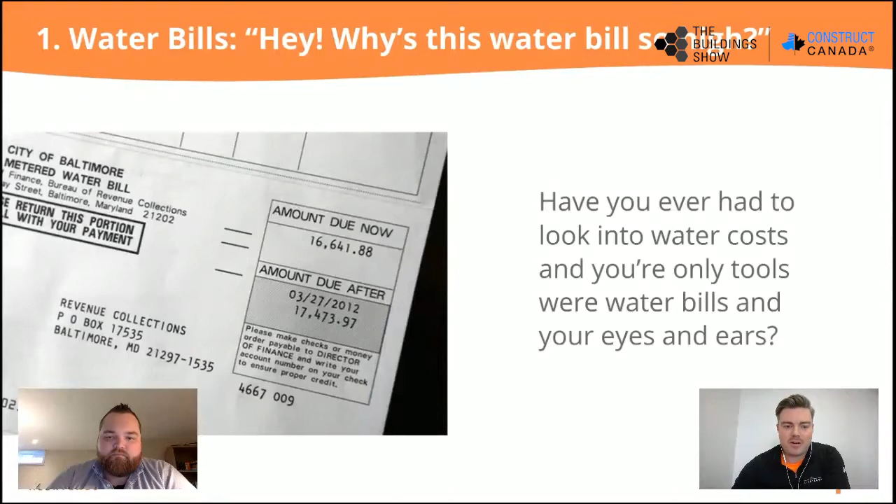Yeah, there's not much you can do once the bill comes in. There's no fixes that can be done. Yes, you can avoid it in the future, but once that bill comes in, that's the money you owed, and that's it.

Especially when water rates are going up constantly in both the Canadian and US markets - as much as 100% increase in the Regina area, and in the GTA we're seeing anywhere from 40 to 80% increases. Right across the country, we're seeing this trend. The only way to effectively change and control some of these costs is to manage when water is being used and how much is being used. At the end of the day, the costs are going to continually go up, so making sure we're on top of these leaks in real time is going to be very important.

A good comment you had the other day, Jordan, was that water costs are going up - what does that mean for rent? That means rent's probably going to go up as well. Absolutely, and unfortunately rents and leases are sometimes locked in, and we can't cover all these changes in increased cost. So the only way to do this is to manage the actual water use and try to mitigate some of the consumption.

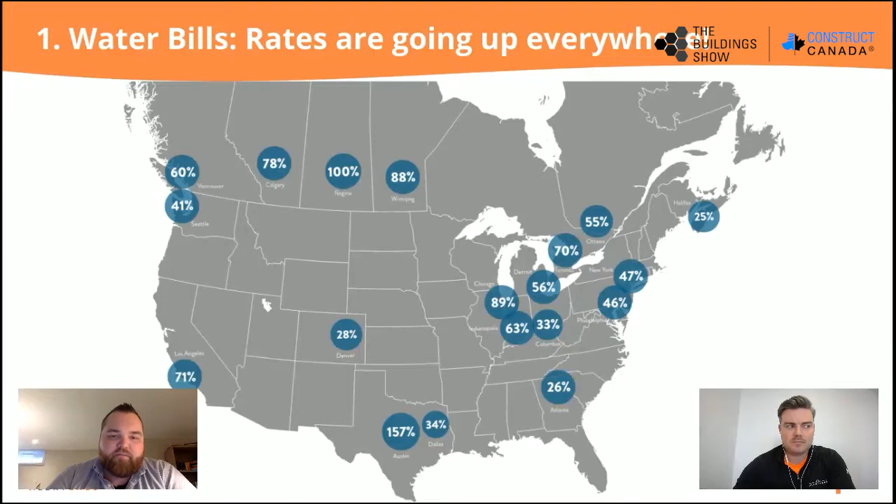So let's look at real-time water usage visibility - how can it help? The importance of real-time visibility is it gives you an understanding of when water is running through the property. You'll be able to break down granular consumption to as much as minute-to-minute data points, so you can really understand what your leak consumption is and quantify that, and even break down what your mechanical systems are using.

So you're going to see the operational time of your irrigation system, your boilers, and anything else. Even if you're filling up a pool or any other systems in the building, you'll be able to quantify what that system costs you to fill up and operate. Especially when it deviates from normal activity, you'll be able to react to it in real time to make sure repairs happen and the system is running optimally.

Yeah, some level of visibility you can gain from this is knowing how much it costs to cool your building. That's pretty key - sometimes you're just blindly getting the bill and saying, how much did it cost to do this, how much did it cost to fill the pool? With this type of visibility, you're able to start to pick those apart and prioritize - should we be paying this much? Is this something we can reduce as well?

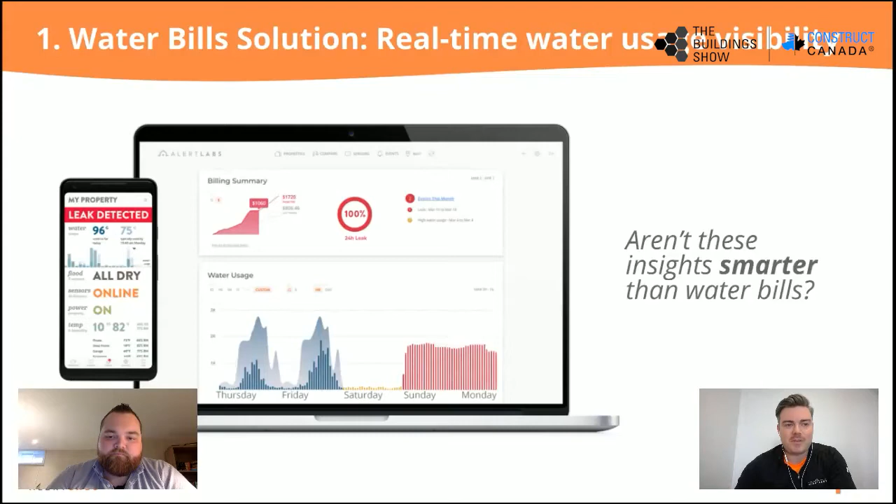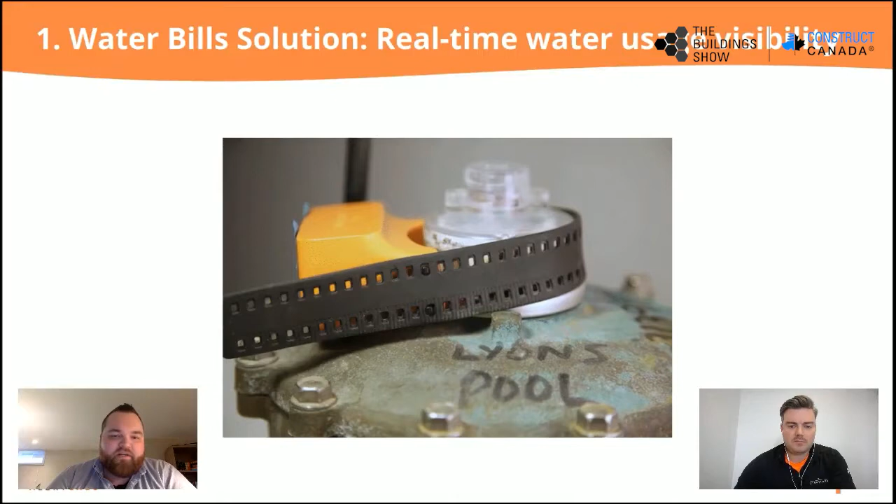Smart sensors are supposed to be very easy to deploy. IoT technology is meant to be strapped on as easily as this on a water meter and provide you the insights we were just discussing. That looks pretty easy, and a great animation as well.

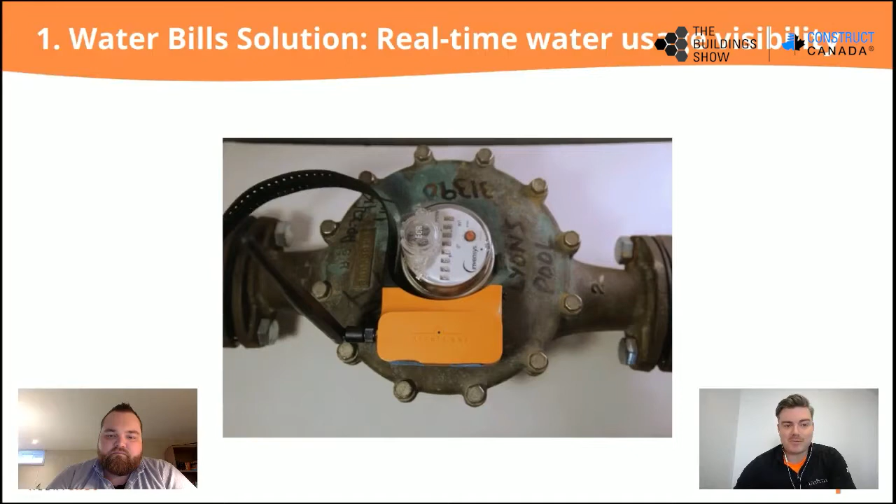Let's move on to number two, water damage. Emergencies at 3am, not fun. Nobody wants that. Nobody wants their cell phone ringing. Nobody wants to have to get out of bed, especially as we approach the winter months, and go into the unit.

So as we get these calls at 3am and have to react to these problems, one of the main benefits of including a smart sensor is to be able to respond to these issues in real time so we're not reactive and facing major infrastructure damage.

Obviously, when these events happen, they're a massive waste of money. These are non-budgeted events. It's extremely emotionally draining, not only on the staff and maintenance team, but also very hard on the tenants or owners of the units, making it very difficult for them to either live in their space or continue operating their business if it's a commercial application.

It's also very time intensive, making all the repairs, ensuring mold remediation, all the infrastructure work, and mobilizing trades is very difficult and time consuming, especially in the climate we're in right now with COVID. It's very difficult to get all these parties involved and make sure everyone is safe and following the right practices. Cutting down response time to these leaks is imperative to minimize the amount of damage and strain on the entire system.

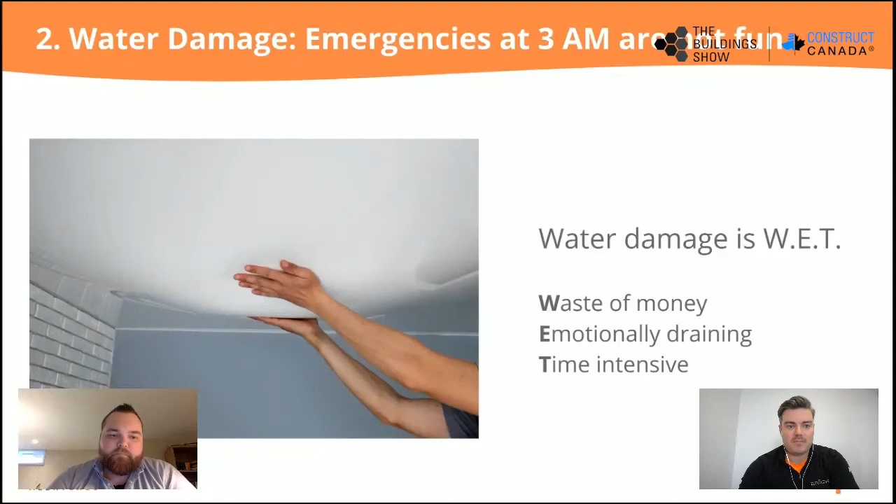There are lots of areas in buildings that are constantly aging. Even brand new sites can have infrastructure breakdowns, typically related to plumbing repairs and things like that. But as aging buildings continue to get older, the infrastructure will continue to wear and break down.

A few common pieces are laundry hoses. They get brittle, break down over time, lose their seal, and eventually either blow or start to leak and cause damage. This is one of the most common pieces we see failing in buildings, where floods and leaks go undetected and cause lots of damage on the laundry units.

Other common areas, as we're all aware, are under your kitchen or bathroom taps, and of course toilets are always a prevalent area where leaks and floods can happen. All of these pieces are inevitably going to have a leak. It's just a matter of being proactive, understanding that as aging life cycles come up, repairs and maintenance are needed, and especially with aged infrastructure in your existing property, minimizing the risk and reacting faster when a flood does happen is going to be very important.

So true. Something we often talk about with our customers is minimizing the severity of events, so how can we reduce that time? Something we'll get into a little bit later.

A key point here too is talking about fridges with water ice makers and direct water lines. Those flex hoses crack or are incorrectly installed very often, and water could be running onto the wall behind your fridge and you'd never know about it, unless you moved your fridge and did a cleaning. And we all know we don't do that too often unless we're moving out of our units.

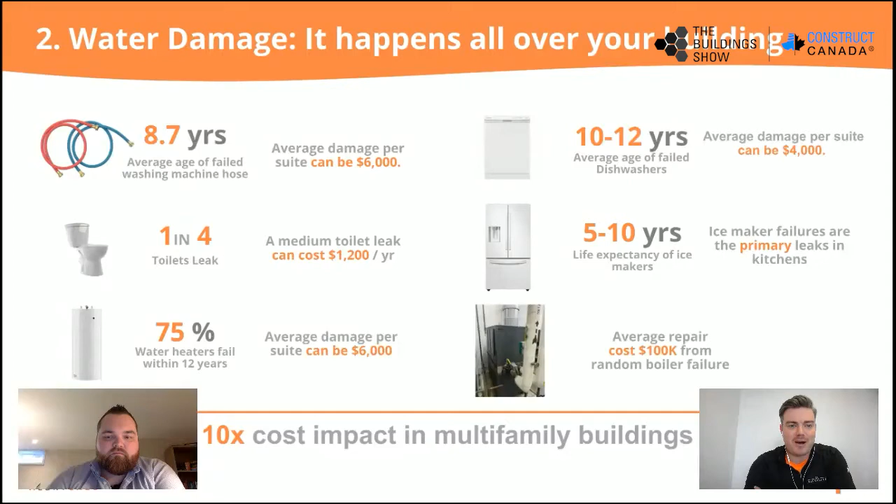A typical condo flood right now costs $250,000, and this isn't just to repair the units. In a lot of cases, this covers the cost of removing tenants from the space, deductibles, repairs, and bringing in trades. The complete process usually costs around $250,000. So any way to avoid this and cut these costs down is going to be very important moving forward for property management and asset managers.

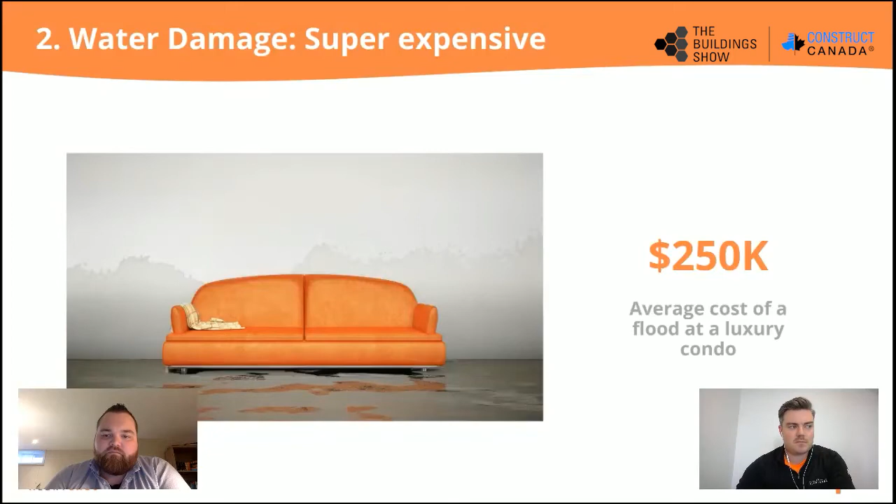The longer the delay, the more the damage. This is something we hinted at a couple slides ago, but we want to go into more detail. Water damage, by the time the event is actually discovered, is completely correlated with the cost of the flood. So the faster we can create response times, the faster repairs get done, and the cost incurred is drastically cut down.

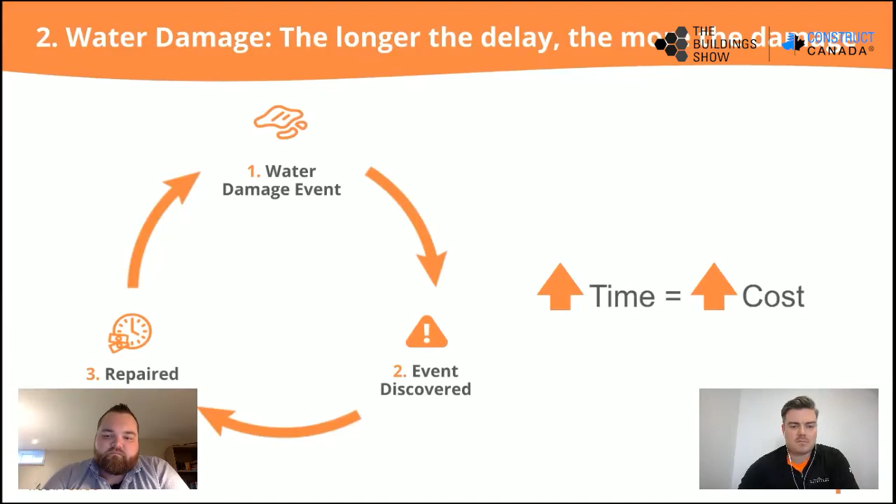Time is money, we've talked about it. The president of Chubb North America mentioned that the time it takes to discover a leak is the single greatest factor in determining the amount of damage. This is where smart sensors are imperative, being deployed so that time frame can get cut down, even from an hour response time into 15 or 20 minutes. That will make a massive difference in the amount of damage and how long repairs will take.

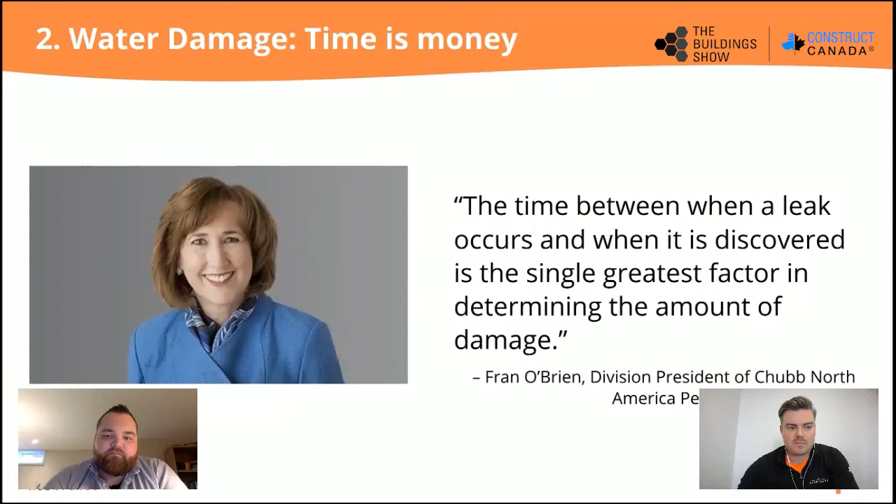Let's talk about the solution. Flood pucks are a main component of flood detection. They can be remotely placed anywhere in a building and typically won't require any infrastructure upgrades. They can be customized and placed everywhere from laundry units, dishwashers, and bathrooms, to condensation fan coil drip pans to make sure they don't overflow. They can be strategically used in lots of areas, even high volume, high risk areas like mechanical rooms. Basically anywhere you want eyes on a potential flood in real time, that's where you put these flood pucks.

Jordan, you mentioned a couple different locations. When talking to a client, what's the first area you think they should protect? I think it would have to be your mechanical areas and laundry area. They're the most prevalent and common leak areas in the building that cause floods, and typically cause the most damage. It's the amount of water in those rooms, in those cushion tanks, in those hot water heaters, something you really have to be aware of.

Absolutely. Major infrastructure, when it breaks down, especially with high volumes of water, is going to be costly and affect the entire tenant base in the building. If they lost a boiler or a hot water tank, everybody would be showering with cold water the next day.

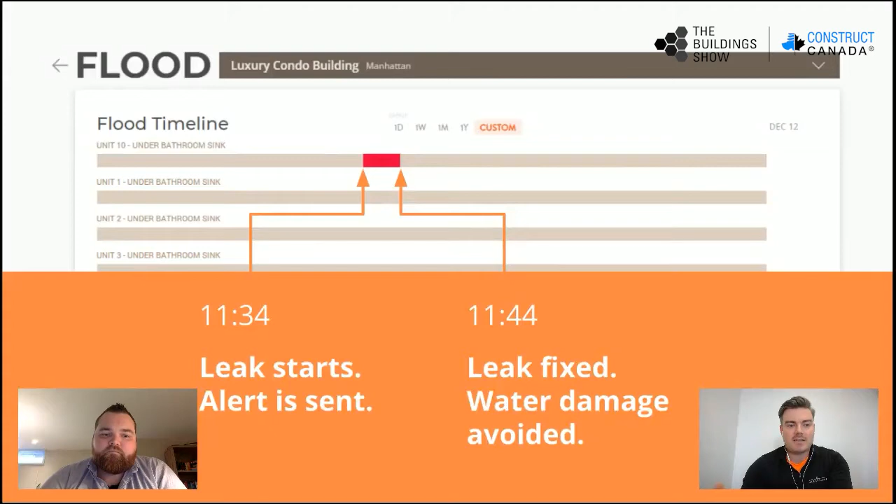It's really key to not only get this quantitative information to say this is when it happened, this is how often it's happened, the duration, but also action your team to start getting you more qualitative information to say what happened, what was the fix, where was it. Is it simply somebody mopping up, or is it a pinhole leak? These are key things to track at your buildings as you deal with aging infrastructure, to see if they're patterns or one-offs.

With the flood pucks, as mentioned, you can be very strategic with placement. Showing an elevator pit here, building managers and owners can all relate to this. As soon as a cab touches water, there's an extreme amount of cost involved in getting that cab operational again and getting TSSA to release it. So understanding if there's ever water in those pits is very, very important, so you can shut that cab down prior to it hitting that water, find out what's going on at the base of the pit, and get it repaired before receiving thousands of dollars in a bill from your elevator technician.

Another key point is in these times with limited restrictions on how many people can be in an elevator. If you have 3 banks of elevators and one goes down, that's going to increase time for your tenants to get up to the 15th floor, 11th floor, and people start to build up in those lobbies. Avoiding these issues will avoid this congestion and the many dominoes that come with it.

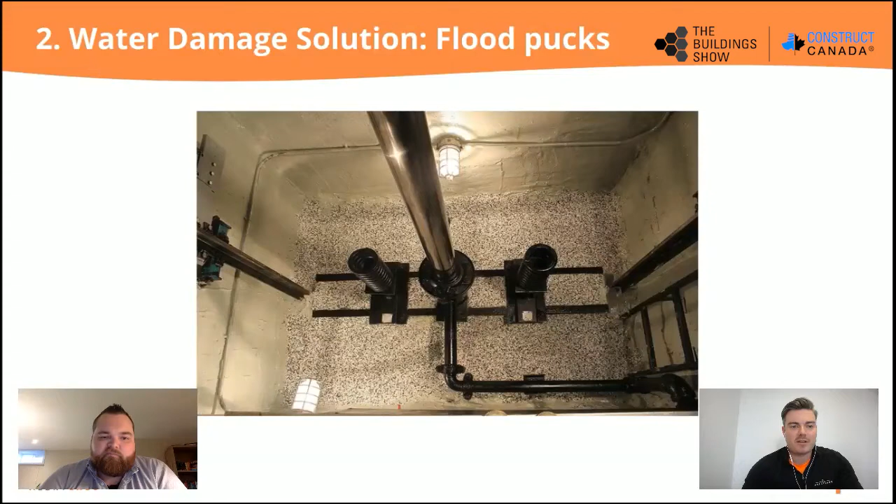The other piece of technology is a water overflow sensor, and these sensors can monitor sump pumps and their health and how they actually operate. They'll monitor the depth of the water in the pits and that they're being evacuated effectively and properly. In times of power loss, when that pump potentially does not have power, it's still going to remotely monitor the system for you and give you real-time alerts as the pit is filling with water and potentially overflowing. You receive those notifications, so you can create an appropriate actionable plan to hopefully get that issue rectified before it actually damages the site.

Another one of those locations where a large amount of water can be collected that can cause a lot of damage in a very short time. Key to keep track of this as well.

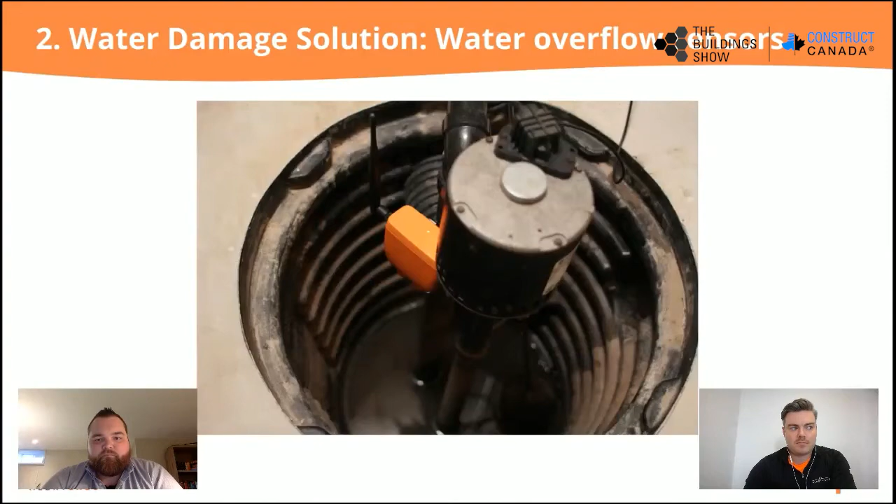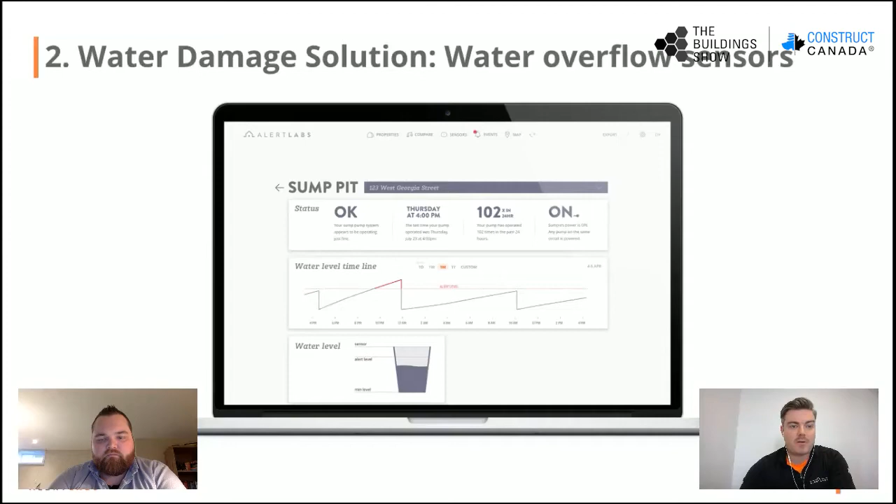Again, circling back to the dashboard, it's important that the data is palatable, easy to understand, and itemizes everything. Here, showing you the sump pump data, you can see the pump pumping out and refilling and pumping out again. This gives you the life cycle of the pump, seeing that it's running properly, as well as pit warning levels for consumption. This also helps with monitoring the health of your sump pump - what's happening, how frequently it's going off. If it's going off every hour, that lets you know the lifespan of this particular unit may not be as long as at another building that only goes off once a day or once every 2 days. So that wear and tear on those units can be monitored.

One other item that's very important is the automatic water shutoff valves. These can be strategically placed anywhere. You can put them in high volume mechanical rooms, on varying sizes of pipes. They can even go on individual unit shutoffs, and this gives you that remote capability to automatically shut water off from either your smartphone or the dashboard online. So you can literally be anywhere in the world and remotely turn off the water.

Now, these systems can also be trained to be very smart, so individual flood pucks can be deployed in strategic areas, and they can basically be trained to say any water that's been located on X number of pucks will shut off this automatic shutoff valve. So then in the event a leak has occurred and there's flood damage taking place, they will automatically send that alert and shut the water off. So that issue will then be remedied until human interaction can then take place and make the appropriate repairs.

But this is a massive piece to the puzzle when we're trying to cut down on response time, and insurance companies in a lot of cases are looking for this type of technology as well, which is what we're going to touch on in another few minutes.

Yeah, it's key to have that two approach system, right? It's not always automatic shut off. You can also go into the application on the dashboard for the shut off and turn it off manually after you get an alert. That way you're not shutting off water to the whole building just because a mop pan spilt over or something like that, right?

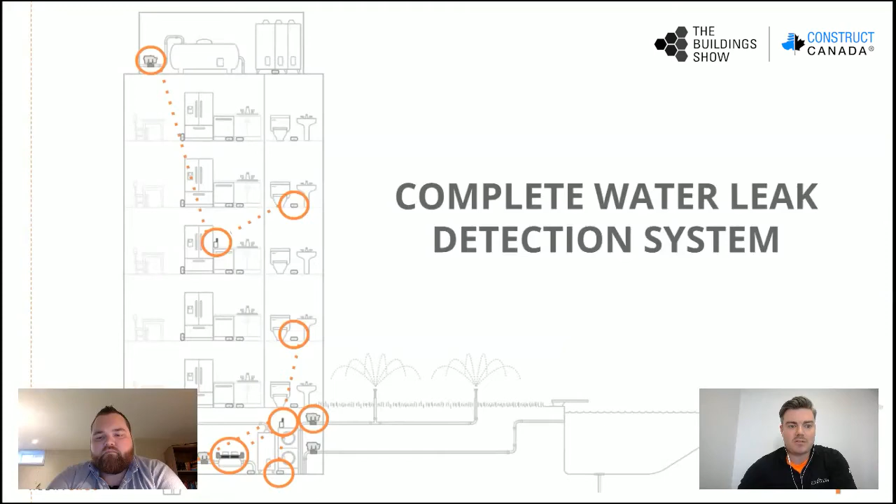So move on to number 3, like Jordan talked about, insurance costs. I need insurance to cover my insurance. We'll get into a little more detail on that and what that means on the next slide.

So circling back to the water damage event and the time closed to the event discovered and then it being repaired, this is completely driven by our insurance costs and our current rates that are continually skyrocketing. And as mentioned previously, with the insurance firms getting heavily involved in this, this is now a double-edged sword where the benefits of having smart systems and smart sensors deployed in the buildings is imperative for the building's operations team and the tenants themselves to make sure they're mitigating as much of these risks as possible.

But it's also the insurance companies now getting involved as well. And because they're understanding that these types of sensors are cutting down the regular claims that are being made with water events occurring, this is closing the gap now for both sides, where the faster we get to these problems, the less damage there's going to be, which is the least amount of occurrence of a claim being made, which means the faster repair for the site, and we get back to normal.

It's interesting to see that insurance is getting as heavily involved now, and we're going to talk about that in the next coming slides, as this is the future of managing buildings, having to have these types of smart sensors involved, even to carry insurance.

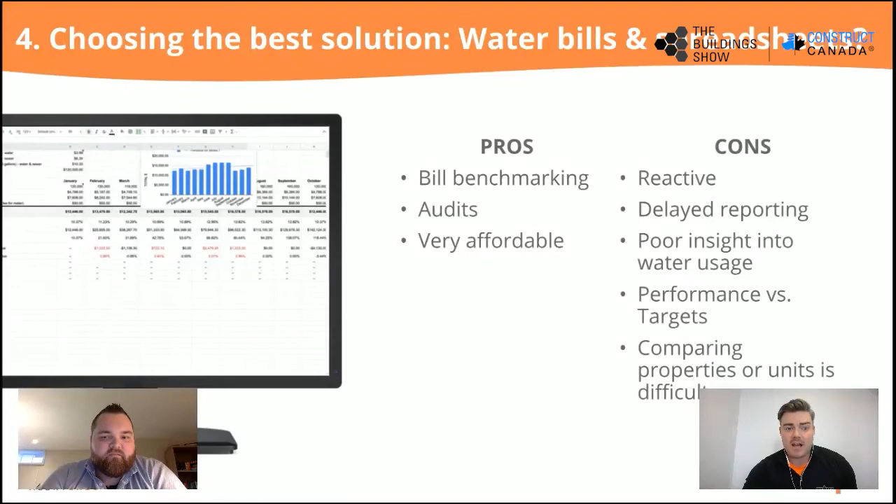Jordan was pretty excited when he left that role to join us here, because he was able to throw his Excel for Dummies book out and focus on the dashboard instead. That's big—not everybody's going to have the ability to make those calculations in a spreadsheet. Having a tool to do that for you, with custom reports and all that stuff, saves a lot of time and a lot of manpower as well.

One big advantage of the smart sensor piece, which we'll talk more about in a few minutes, is not having to require infrastructure upgrades and rewiring buildings. When you implement a BAS system, yes, they're giving you great data from your sites, and we're finding a lot of buildings have these systems in place now over the years. They've been around for a long time, which is great, but they're typically focused on your electricity and gas consumption. They're not always as focused on water, and definitely not looking at leak or flood.

These systems are definitely useful, but they're very complex. They take a long time to deploy, and not everybody understands the data that's coming out of them. So it's not necessarily user-friendly or something you'd want to deploy through your entire property management organization. A big challenge will be understanding the data, being able to comprehend it, but also the data points coming out of it are not as granular when it's not purely focused on the water piece. We do see some BAS systems connected to water meters - they'll give maybe an hourly resolution to consumption, if not just daily readings, which is just a pulse output off the meter. So it's very broad, still doesn't give you any breakdown or real understanding of what's happening in real time or minute by minute. That's where the real value of having these smart sensors can really play a role in a building.

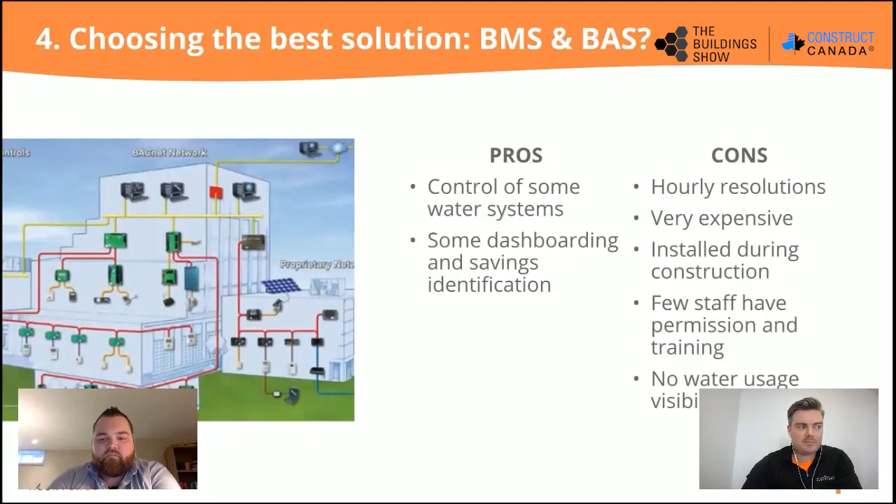Absolutely, it'll definitely add up. So let's move over to Wi-Fi sensors. The key thing we've kind of alluded to and keep talking about is what happens if the power goes out. Unfortunately, Wi-Fi sensors are great for our homes in small spaces, but when we're dealing with large infrastructure like a stacked multi-res building, it's very difficult to have Wi-Fi reach every area of the building, especially in parking garages or mechanical rooms. And in a lot of cases, these older buildings don't have Wi-Fi signal or supply for the entire property. So they're not reliable, and that goes for multiple facets.

It's connectivity, but it's also when the power goes out, or a modem needs to be replaced, everything will have to be recalibrated. All the sensors will have to be repaired, and it can take a tremendous amount of time - it's extremely unreliable. Even when there's storms and things happening, buildings can flood and different events happen, and that's when you need your system to be working properly. So having a system reliant on Wi-Fi is definitely not the best for a commercial real estate application.

So it sounds like if the power goes out, you could be spending a lot of time once it's restored walking around the building, unplugging your routers, plugging them back in, unplugging your repeaters, plugging them back in, going to your smart sensors to make sure they're communicating - something that wouldn't be automatically restored or maintained with other solutions that have the ability to work without Wi-Fi. Absolutely, having a battery backed up system and something that's cell connected is imperative to make sure you maintain your online connection through any type of weather or event taking place.

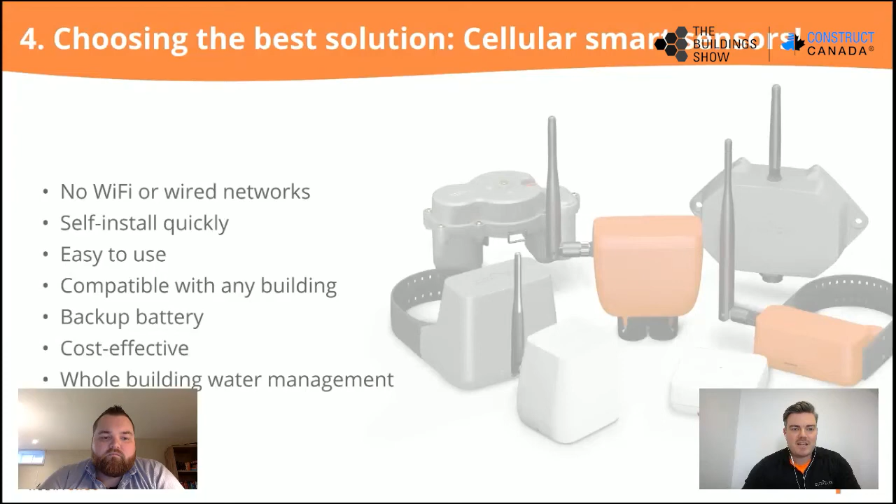Backup battery too - power outs, cell network's up, 24 hours backup at least would be great. Features that we've seen before. And then something that we keep hitting at, cost effective. The cost of outfitting your building is less than the cost of that damage you had a few months ago, typically, and then less than those insurance claims and deductibles that you'd have to make as well too.

Create your network with the cellular devices, place the companion pieces out into each unit. You can even simply place them outside the door and with the label say dishwasher, and the tenant knows to place it by the dishwasher. Pull the battery tag, you can do that yourself, and that's communicating to the network. And then you have the visibility of seeing the health of those batteries, health of the sensors remotely on a dashboard to know that you don't have to go in to check it. The tenants don't have to be responsible to check it as well too. Having that remote access and touch, decreasing the touches is quite key.

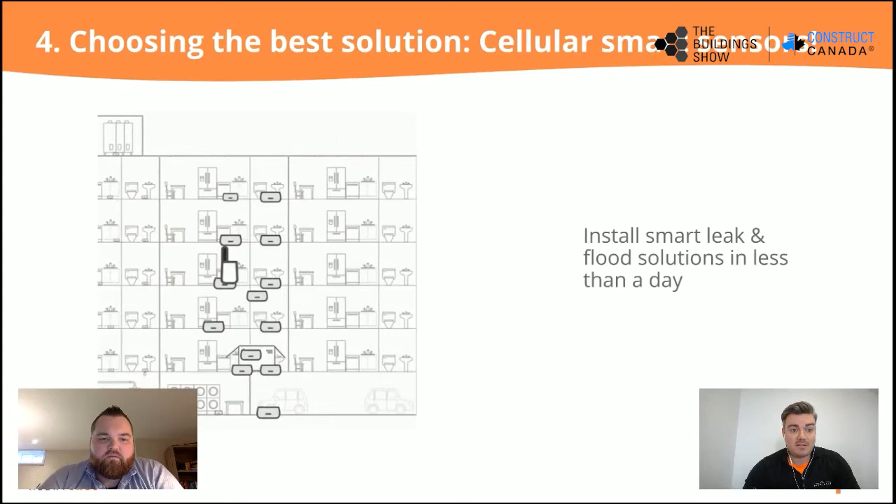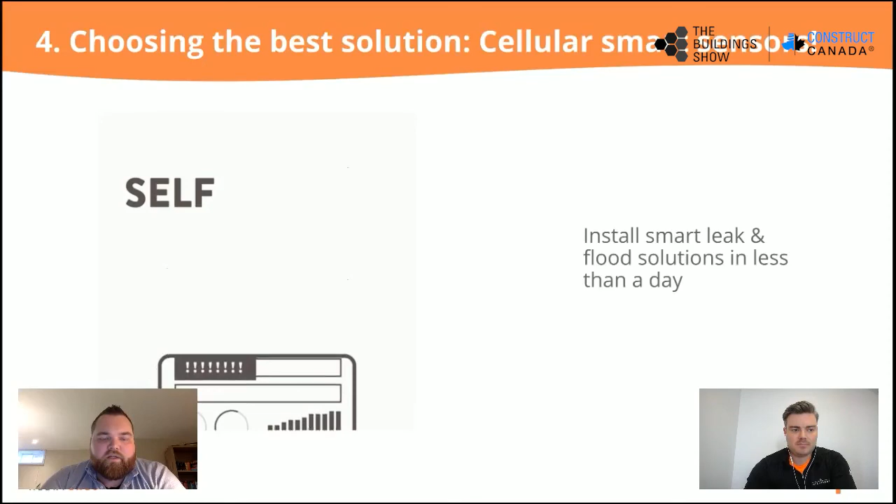Yeah, we like to thrive with the touchless install, very important with COVID these days. So you're able to do a deployment very, very quickly with a comprehensive system that can be in every unit or in major mechanical areas, but again, very customized. With portfolios, you also need this dashboard to be able to supply you with data from all of your properties so you can analyze and compare building to building or unit to unit.

Being able to see this on your phone or on a computer is very important. As you work remotely, traveling around servicing buildings and doing different things, you need to be able to understand what's happening at each property. It gives you that peace of mind to know that every night when you go to bed, that portfolio is running the way you want it to, and that there are no events currently ongoing.

Ease of use is very important. Yes, you can go to a separate dashboard to look at your water damage and water damage prevention pieces, but you also have the ability to look in your one tried and true program to get your minute by minute water usage and get alerts on a potential leak at the site, wasted water, or abnormal water events where the usage suddenly spikes. It could just be filling a pool, but it could be a burst pipe. Getting that integration is quite key.

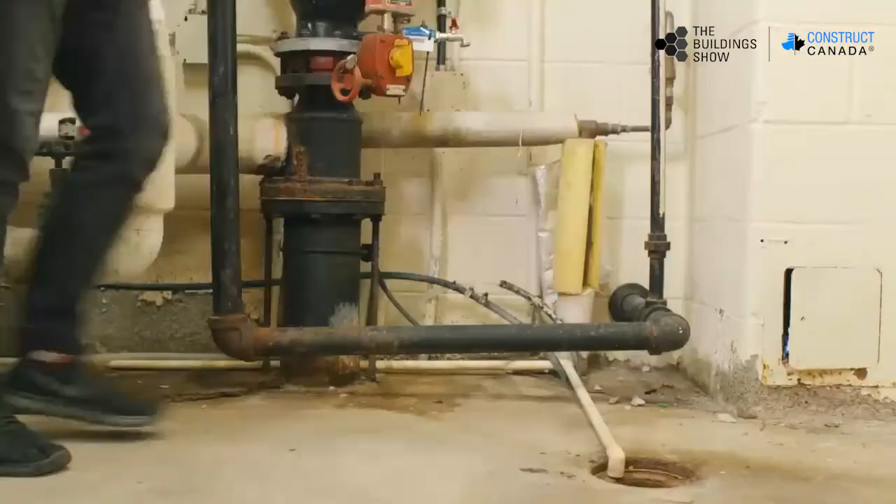The very first flood that we were able to avoid was within a couple of weeks. We had received a phone call within seconds that there was a leak in a washing machine.

Hello, this is Alert Labs. The Floodie Flood Sensor has detected a flood in a laundry room of suite number 546.

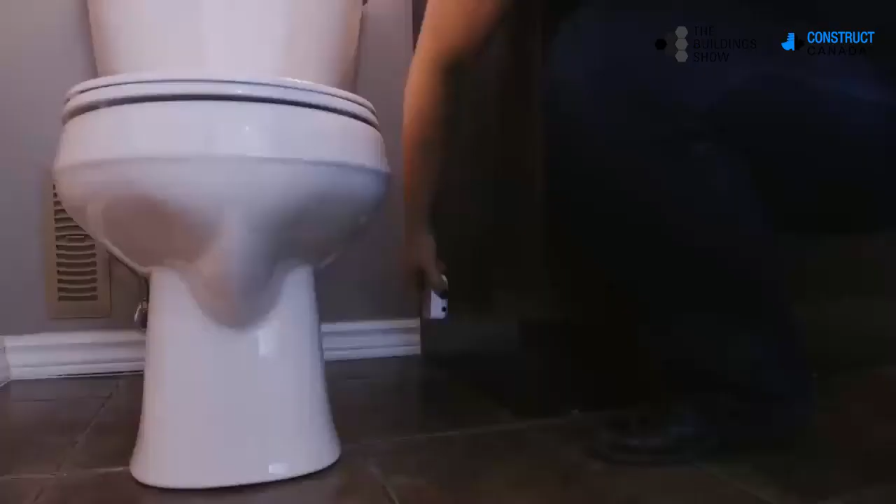Our security guard went upstairs to check it out, knocked on the door. The person who answered didn't think they had a water leak, so we actually went in and looked at the washing machine and there was water all over. We were able to avoid any damage to the suite below. The person below wouldn't even know about it.

It's helped us save definitely a few thousand dollars because we've had about 3 or 4 of these happen. It was a piece of cake setting it up, and it's been a piece of cake since whenever we installed it last fall. Of course, I would highly recommend it to anyone, whether it's a condo building or residential.

So some of those quick hits that Paul hinted at was ease of deployment, something that we keep bringing up today. And another thing we haven't really talked about is those common areas or those behind lock and key areas like the elevator, the boiler room, places that aren't often visited. You are now looking at the in-unit piece as well too.

So all of a sudden we're bringing in the tenants, they have to report something, they have to be the proactive piece. Not always the case, it could be seen as a nuisance to report this leaking toilet, this leaking kitchen sink or whatever it may be. They may not report it until it is a true issue. So kind of putting together that solution and giving you the option to take control back of what's happening in the unit is quite key.

Yeah, it's very important having these systems deployed, obviously, and in Paul's case, as he was referencing, the ability for these systems to alert them to these 2 or 3 events that happened very shortly after their initial deployment avoided them having to make insurance claims, and for them this would save thousands of dollars in deductibles and the events, and obviously all the other tenants and everybody else affected. So it's a compounded piece where once these sensors are deployed, they immediately work in your benefit and for the long term.

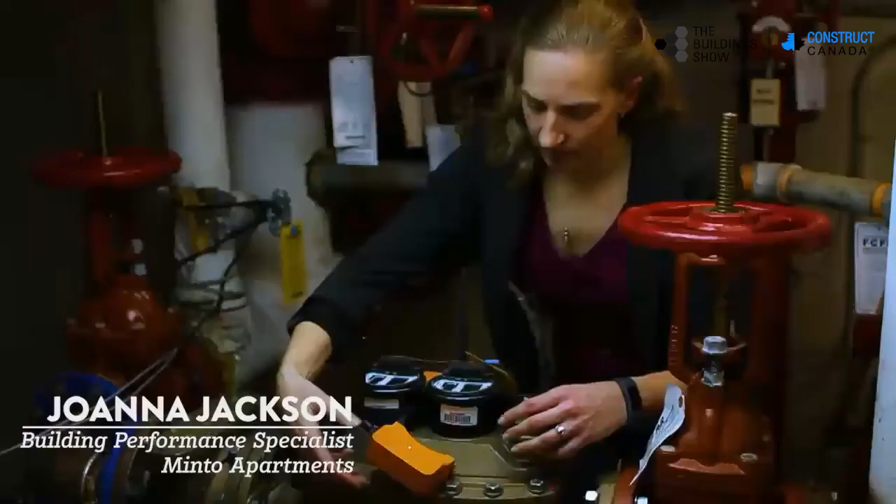Using the Flowie device, the projects that we've implemented have had very short payback periods, usually 1 year or less. And we estimate that we've saved approximately $100,000 in annual water savings.

So this is quick and easy, obviously, a story for Minto. They had one building catch a major ongoing leak, and as you acquire new assets, even buildings that have been in a portfolio for a long time, you generally think how much water the property should be using, and you think this is normal. But without having these sensors deployed and really understanding the granular data, sometimes some of these things have been ongoing for years and happening, and we're not really sure why there's so much water use.

But identifying the run rates and what that's currently costing the organization, you can really create a strategic, actionable plan to cut down and cut out that excess water use. And in their case, they saved $100,000. Obviously, this is a huge test case for them and was very successful.

But what we do find on a typical basis is 5 to 8% of excess water use at buildings takes place every single year. And this is a good rule of thumb to compare sites to. Sometimes we put sensors on, and within 24 hours, they can pay for themselves. In other cases, it's paid back well within a year. And that's typically what we do see in the industry.